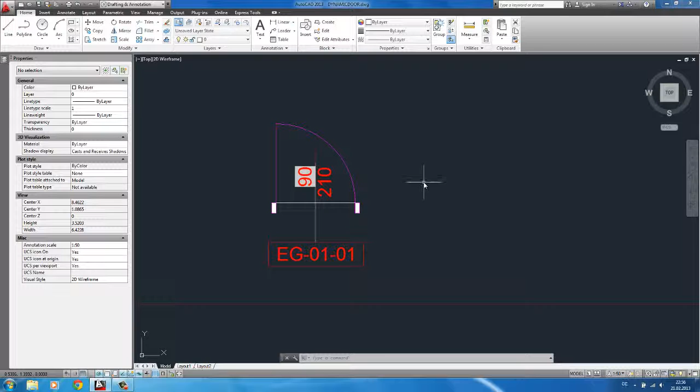So in this video I'd like to show you how to create this dynamic door block and a really simple door tag in AutoCAD. Well, I know that there are some tutorials out there that cover quite the same topic. Anyway, I thought it might be interesting to share this technique that I'm using here. Let's take a quick look at the final result that we're about to create.

You can see it is a block that has some grips attached. With these grips, you can easily change the width of the door frame according to the width of your wall. You can change the opening width, make it smaller or bigger.

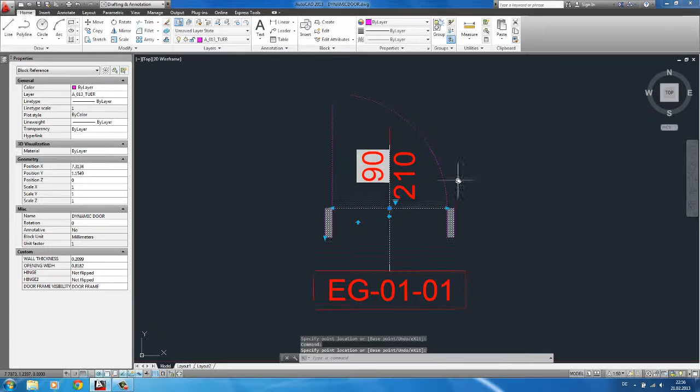Also, I added two flip actions to the block, so you can easily flip it around, something like this, just how you need it. And finally, I added a visibility state to the block that makes it possible to show or to hide the door frame. I will reset this block.

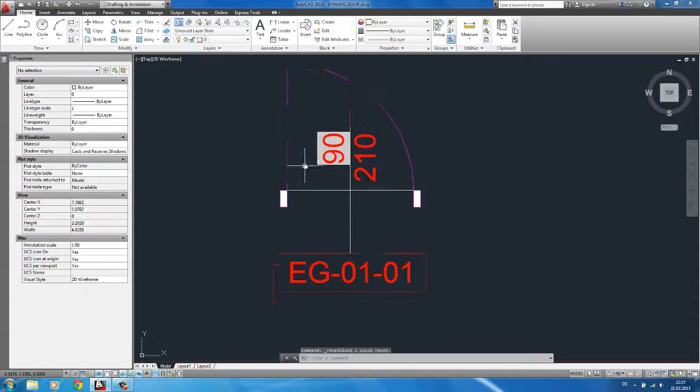This door is connected to this simple door tag, and this door tag is automatically displaying the current opening width. So for example, if I change the opening width to something like 1 meter, and type RE for regen in the command line, you can see that it's now displaying the correct opening width of the door.

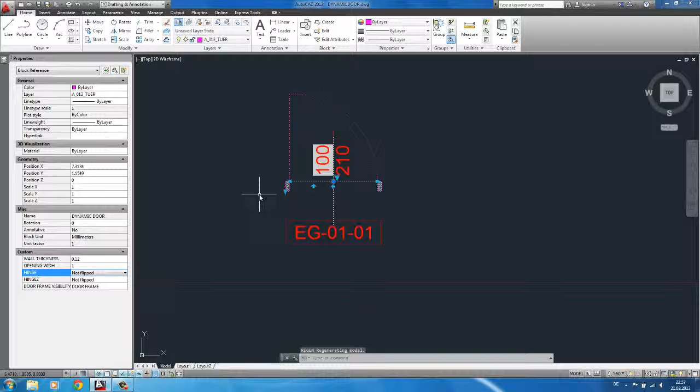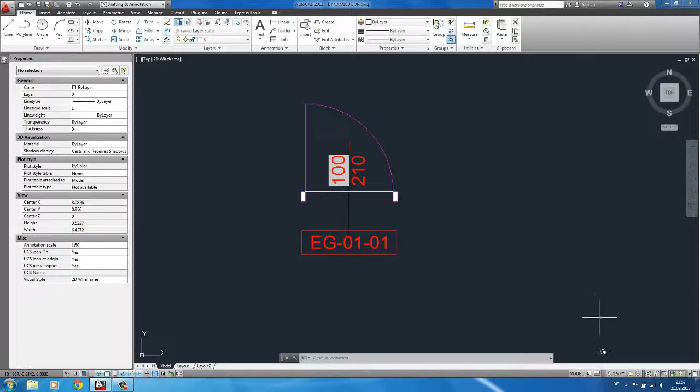I also added an annotation scale to this door tag, so it will automatically scale itself according to the scale of your drawing. Let's take a quick look at my AutoCAD. I use out of the box settings. I'm using metric units drawn in meters. I have my annotation scale set to 1 to 50.

The door itself is represented by some really simple AutoCAD lines. Here we have an arc. This door leaf is represented by a polyline. I also added these two auxiliary lines that are on a layer that finally won't plot. I just used them to position the door right. The door frame is represented by these two rectangles.

I also added a hatch. This is something that is not really necessary, but I tend to do it because I always have problems with the draw order in AutoCAD. And when the hatch is inside the block, I don't have to care about it anymore.

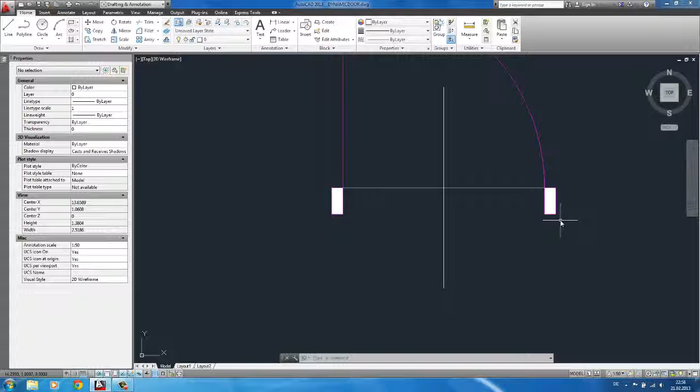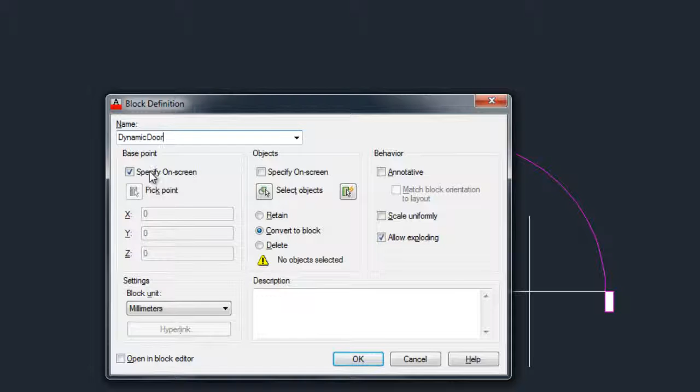To get started, first we have to create a block from the door. So I type block in the command line. I will call this door something like dynamic door. You can see that I have specify on screen base point checked, press OK, select all the objects,

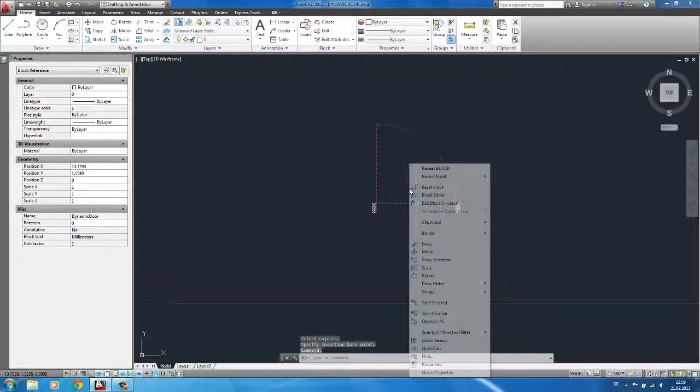enter, OK again, and for the insertion base point of the block I choose this point right in the middle of the door frame. Open it up in the block editor. First I will add a linear parameter that will represent the width of the door frame. I put it here, select it. I lower the number of grips to 1 because in this case I only need 1. I also will rename it to something like wall width.

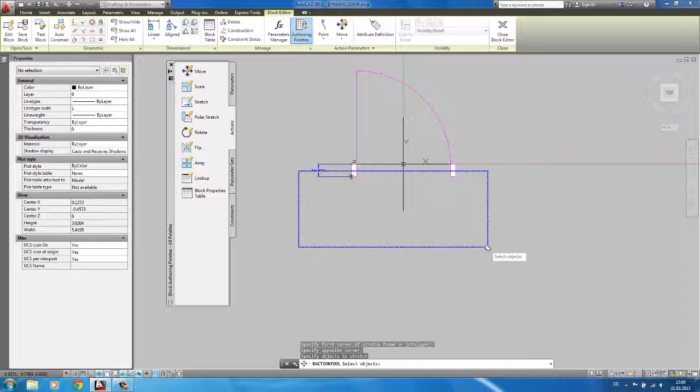Next I will add a stretch action to this parameter. Choose the stretch, select the parameter. As a base point, select this grip and draw a stretch frame. For the objects, I just choose these two rectangles that represent the door frame. Press enter. Let's test it, see if it works. Yes, this looks quite good to me.

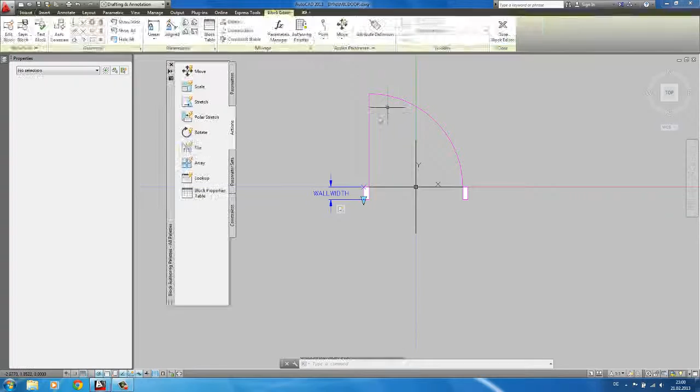Close the test block window and we will continue adding another linear parameter to the door. This parameter will represent the opening width of the door. So I put it here, select it. Here I will change its base location from start point to midpoint. And I will also rename it to something like opening width.

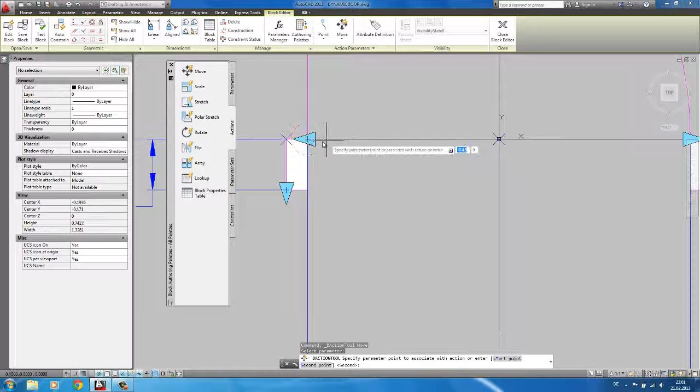Next I will add a move action to the parameter. Select the parameter, specify the base point, which is again the left grip. For the objects, just choose the left door frame. Press enter.

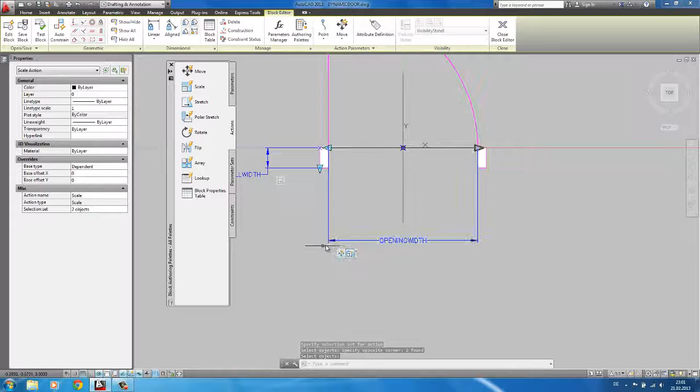Next I will add a scale action to the parameter. So choose scale, select the parameter, and for the select objects, just select these two lines that represent the leaf of the door. Press enter, switch to the scale action, change its base type from dependent to independent, and make sure that both its base X and base Y value is set to 0.

Next I will add another move action to the same parameter. This time I choose the right grip. For the objects I choose the right door frame. Press enter. Let's test it.

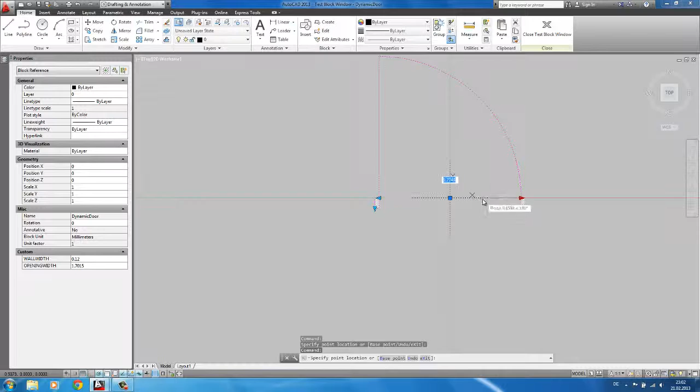This looks quite good to me. What you can see is that these two auxiliary lines are not scaling accordingly to the opening width of the door. This is something we have to fix in the next step.

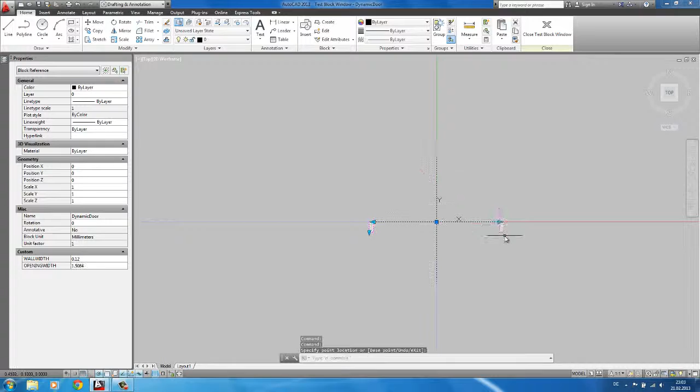So close the test block window, add another scale action to the parameter, and just select these two auxiliary lines. Switch to the scale action, change its base type also to independent, and make sure that again the base x and y is set to 0. Test it again. Now you can see these two lines are scaling accordingly to the opening width of the door.

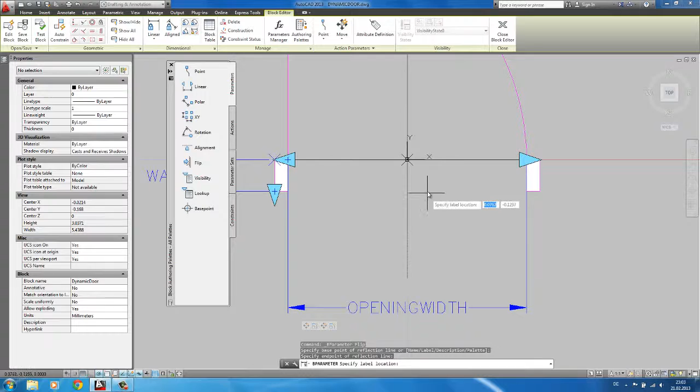Close it down again. Next I will add a flip parameter to the door. Choose the flip, and for now just put it here in the middle. I will rename this flip state to something like hinge 01. Like this, hinge 01.

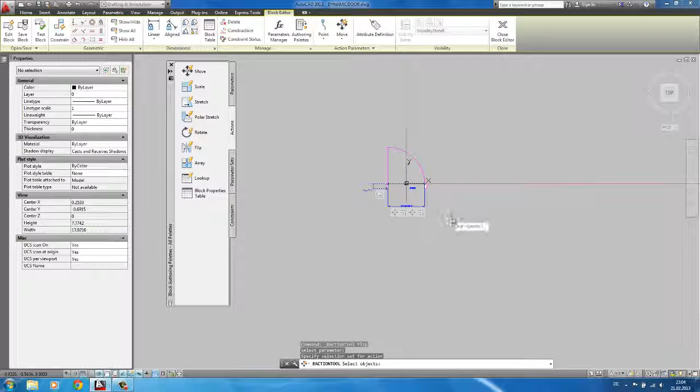And next I will add a flip action to the flip parameter. Select all the objects and enter. Let's test it how it works. Looks good to me. Close the test block window and add another flip parameter to the door.

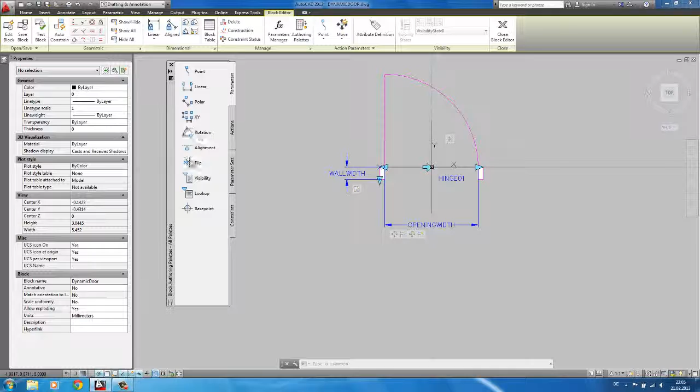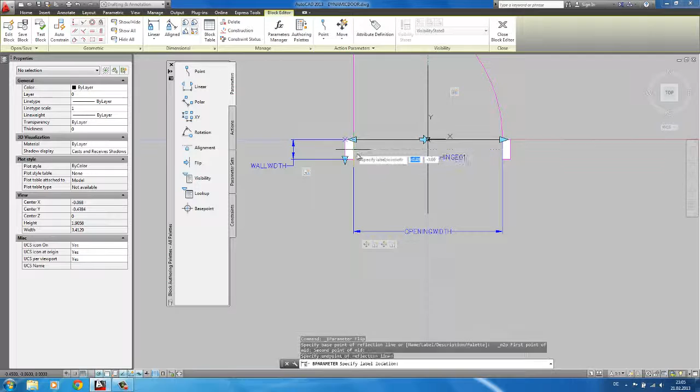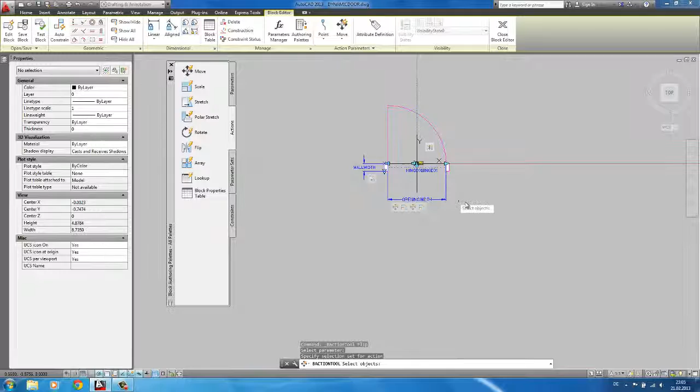This flip parameter I will put right in the middle of the door frame. I press Shift and the right mouse button to use the mid between 2 points snap. And put it somewhere in the middle. I rename the flip state to hinge 02, and I will add another flip action to this flip parameter. Choose that one and select all the objects. Let's test it.

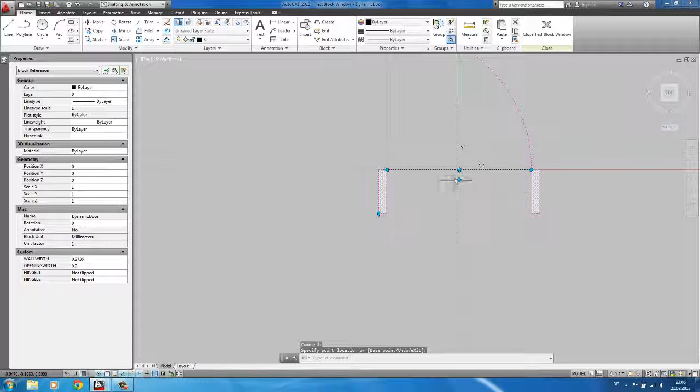You can see it's working quite well, but if you change the width of the door frame, this grip is not moving accordingly to the new size of the door frame. So in this case, it's not working anymore correctly, and you will have to adjust this door manually. We can fix that easily, and I will show you that in the next step.

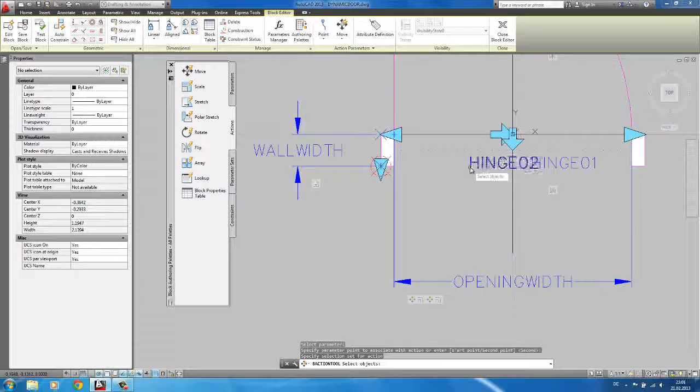Close the test block window down and add another move action to the wall width parameter. Select it. Choose again the grip as the starting point. And for the select objects, only choose the second flip parameter. Switch to the move action and change its distance multiplier to 0.5.

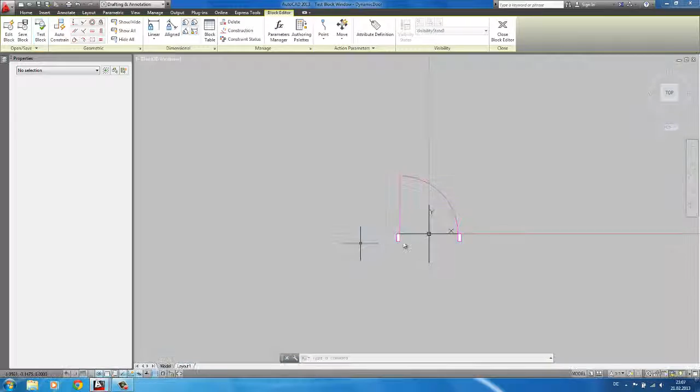In a sense, what we are doing here is telling AutoCAD that this grip of the flip should always be in the middle, or should have half the size of the wall width of the door. Let's see if this works. Now you can see this grip is moving accordingly to the door frame width of the door, and it's staying always in the middle of the door frame, which makes it easier to flip it. Close the test block window.

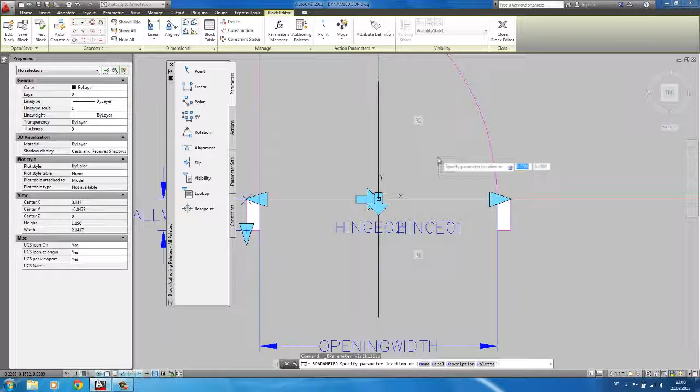Well, I think that we're mainly done with the base block. What I will add now is a visibility parameter. I will put it probably here. Bring it up a little bit. I will rename it to frame visibility. Select it, right click, and open up the visibility states menu.

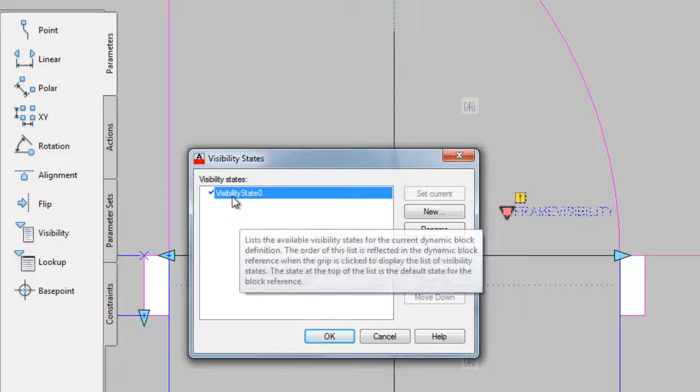The visibility state 0 I will rename to with door frame. I will add a new visibility state that leaves everything unchanged, but will have another name. So I will change the name to without door frame.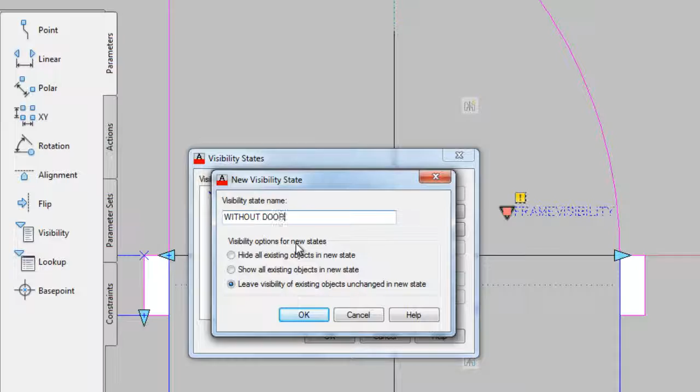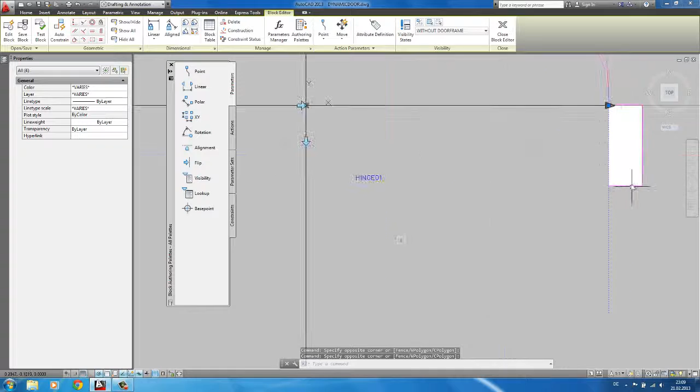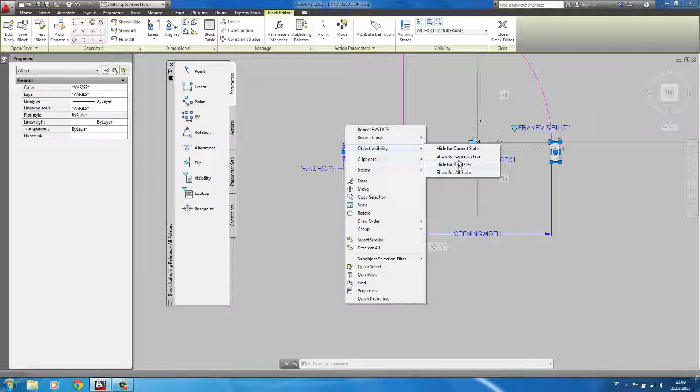Press OK. So the only thing we have to do now is to hide the objects we don't want to see. So in this case, carefully choose the objects that represent the door frame. And this parameter that is adjusting the size of the frame. Choose object visibility, hide for current state. Close the block editor, save the changes, and let's see if it works.

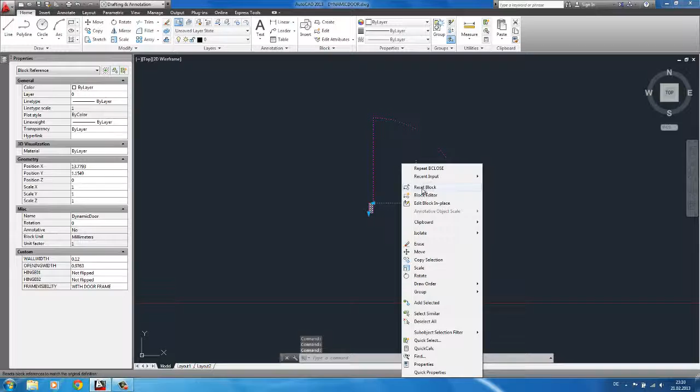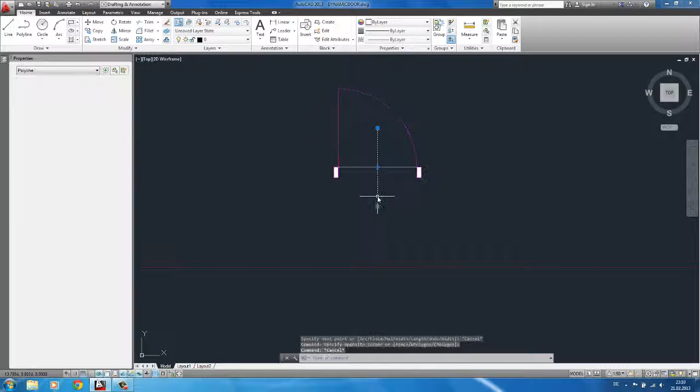Choose without door frame. And again, we have the same flexibility that we had before. I reset it. Next we will create this simple door frame. So first I will draw some lines in AutoCAD. Put them to the right layer. That is my door tag layer.

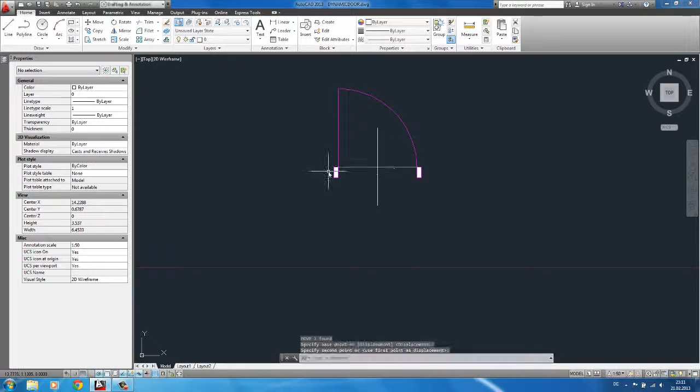Create a rectangle for the door number. Probably something like this. I put that door to the back and use the match property tool to switch the rectangle to the right layer. This looks quite good to me. Next I will define 3 simple attributes. So I enter ATTDEF in the command line.

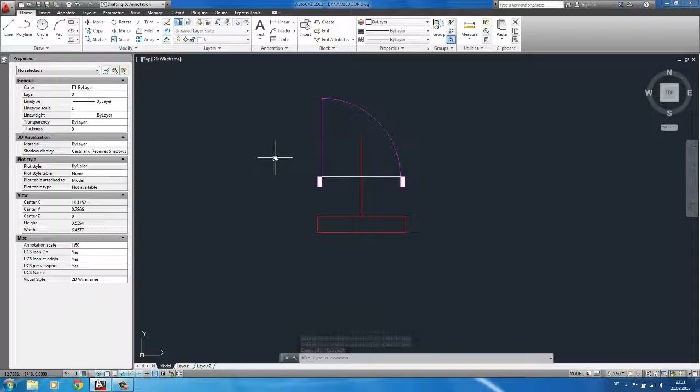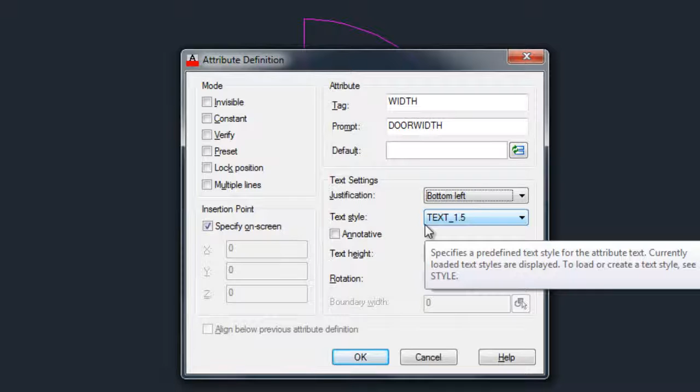I uncheck the lock position because probably I want to move them around. I will call this one width. For the prompt I enter door width. The default setting I leave empty for now. Justification I put to bottom left. The text style is set to text 1.5, which in my case is okay and will represent the correct size of the text. Press OK and put the attribute inside the drawing.

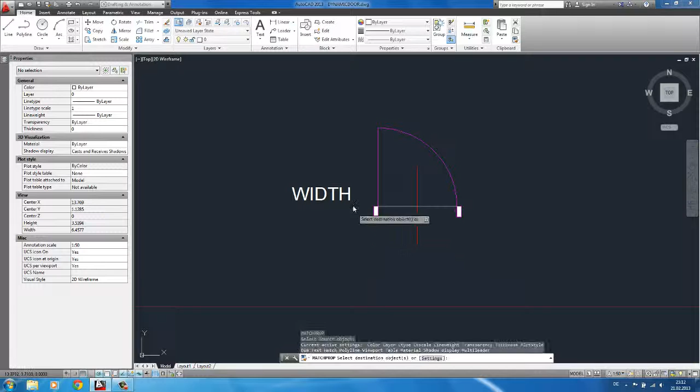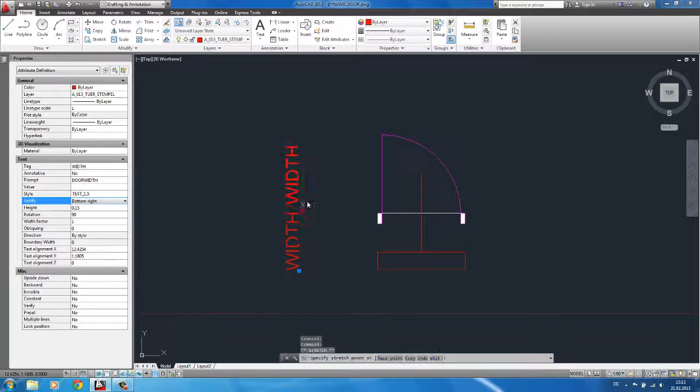Use again the match property tool to put it on the correct layer and rotate it 90 degrees. I will change the justification from bottom left to bottom right. And will position it something like here. We'll change this one later. Let's make a copy of it.

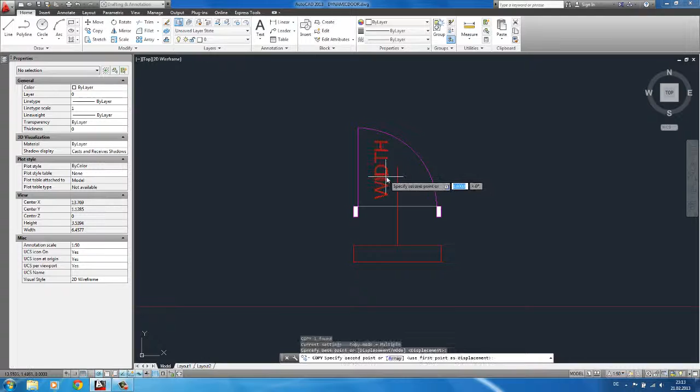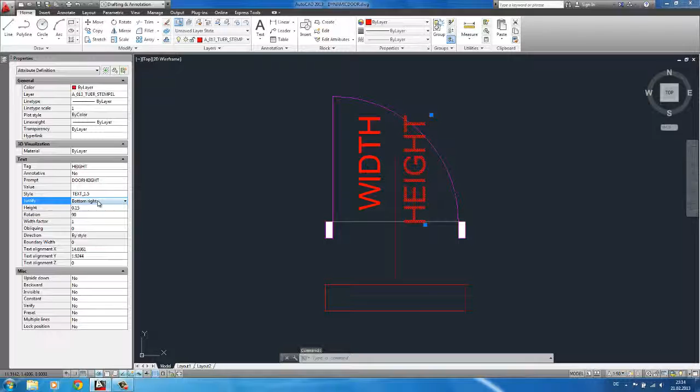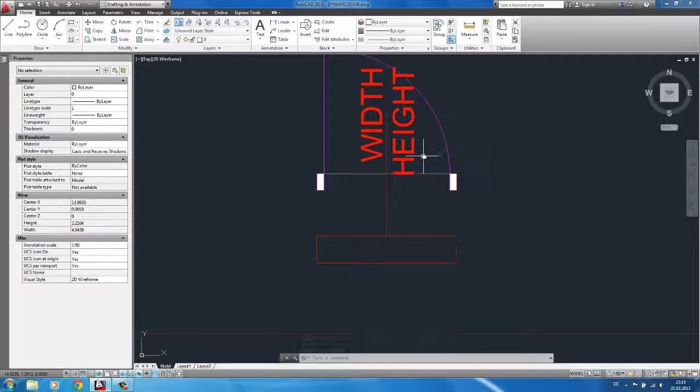Call that one height. Here I enter door height. I change the justification to bottom right. And position it probably here. So the only one that is missing now is the attribute that represents the door number. So I make another copy. And one copy is enough.

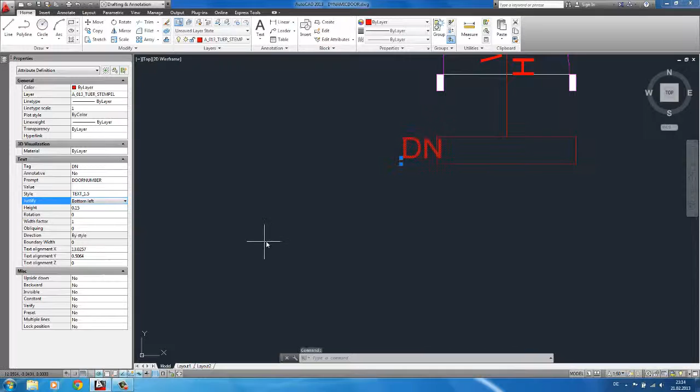Rotate it 90 degrees. Rename it to something like DN for door number. Door number. I put the justification to bottom left in this case. Let's position it probably here.

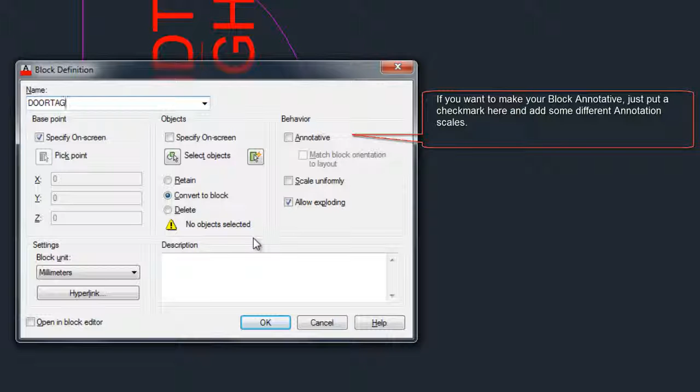And create a block. So I type again block in the command line. I call this one door tag 005. Press OK. Select all the objects. Deselect the door block. Enter. OK. And for the insertion base point, I select this intersection point here in the middle.

For the door number, I enter something like EG for the ground floor, 01 for my room number, and 01 for the number of the door. I mean, it depends how you do it. For the door height, I enter 210, so a little bit more than 2 meters.

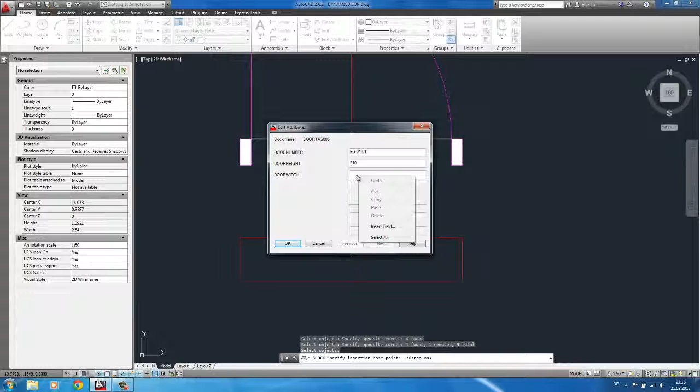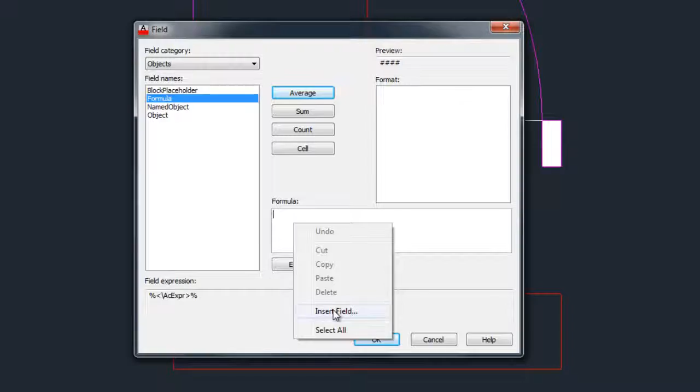And in the field with the door width, I press the right mouse button and insert a field. I choose the object category and switch to formula. In the formula window, I insert another field in the formula field. So right click, insert field. This time I choose again object, object, and select my door block. What I'm interested in is the opening width, so I choose this one and press OK.

As you can see, it's now displaying me the opening width of the door in meters. In this case, I would like to see it in centimeters, because for the height I also used a value in centimeters. To do this, I simply multiply it with 100, evaluate it, and change the precision to 0. Press OK and OK again. So this looks quite good to me. I think these two numbers should be a little bit more on the downside.

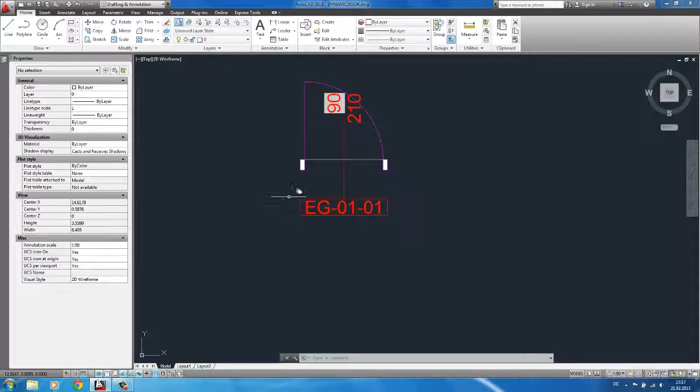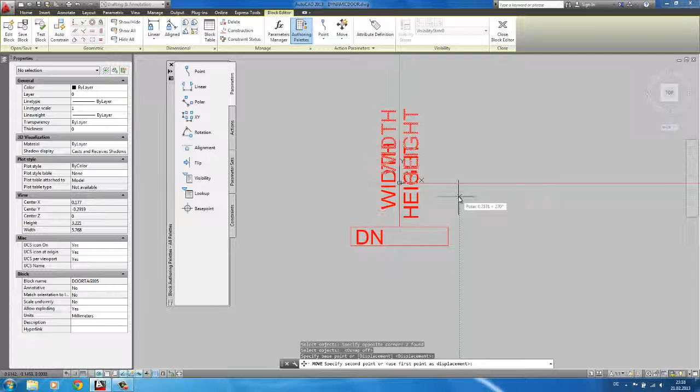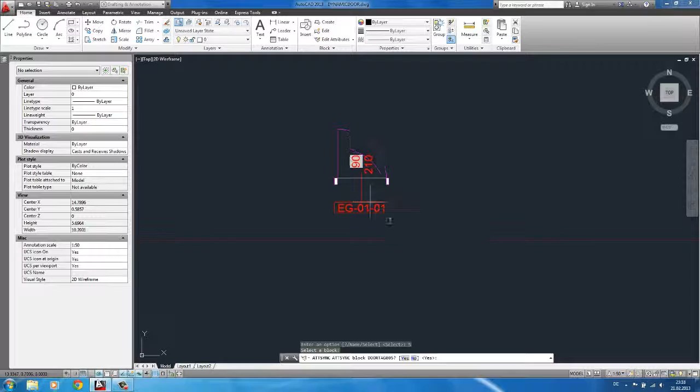So I open the tag in the block editor, switch to the move tool, and just put them a little bit more down. Close block editor, save the changes. As you can see, nothing changed. What we have to do is synchronize the attributes. So I enter attsync in the command line. I select the door tag, choose yes, and now this looks quite fine to me.

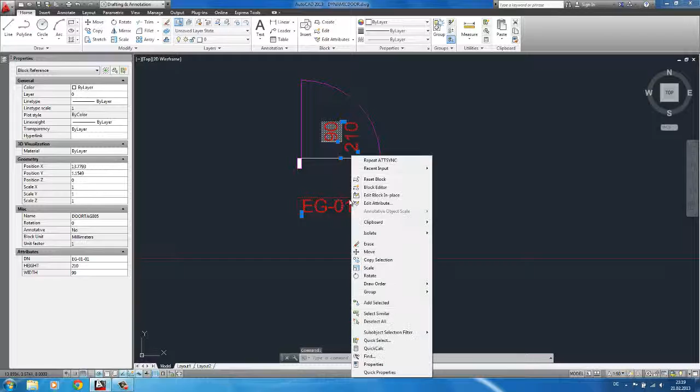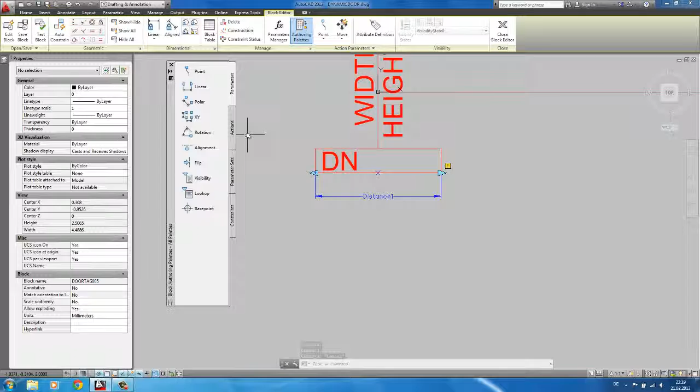I will add two other parameters to this door tag. So probably you want to change its size or the lines. So open it again in the block editor. I define a linear parameter here. I also change its base location from start point to midpoint. And I add two stretch actions to the parameter. So choose the stretch, select the parameter. For the first base point, choose the left grip, draw the stretch frame, and for the select objects, just select this rectangle.

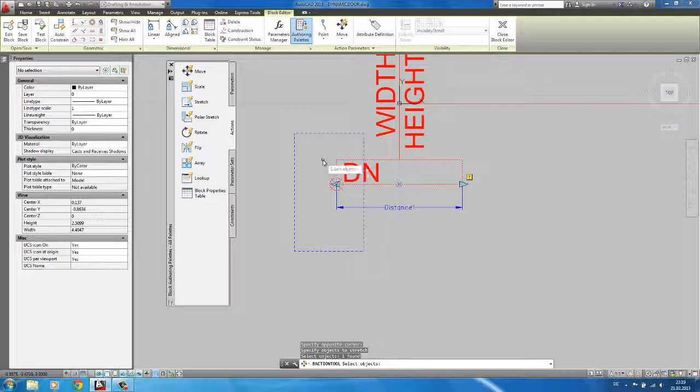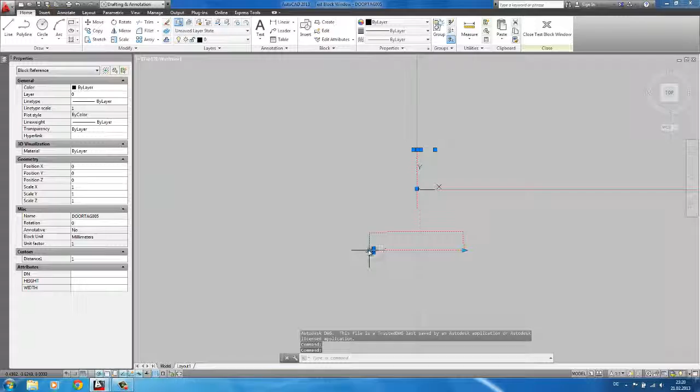Add another stretch action. Choose again the parameter. This time choose the left grip. Draw your stretch frame. Select objects, select again the rectangle, and enter. Let's see if it works. Yes, and you can see you can now scale it according to the amount of numbers that your door number contains.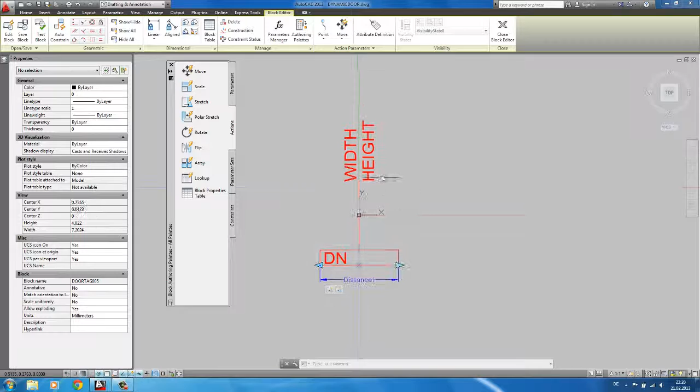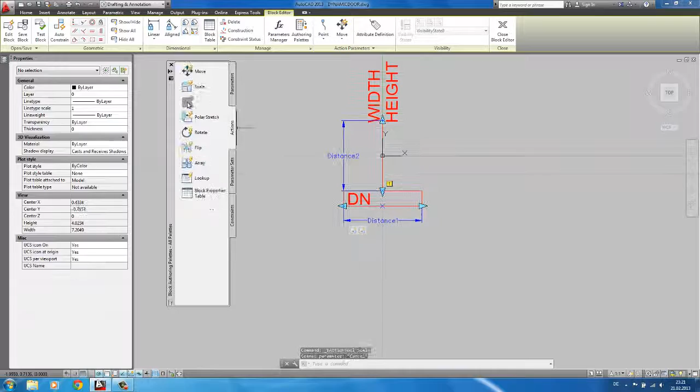Probably one other thing that you might want to do is to add another linear parameter to this door tag. Here we leave this parameter on its base location on start point, and we add again two stretch actions. Select the parameter. As the first start point, I select the upper grip. I draw my stretch frame, and for the objects I just select this polyline here.

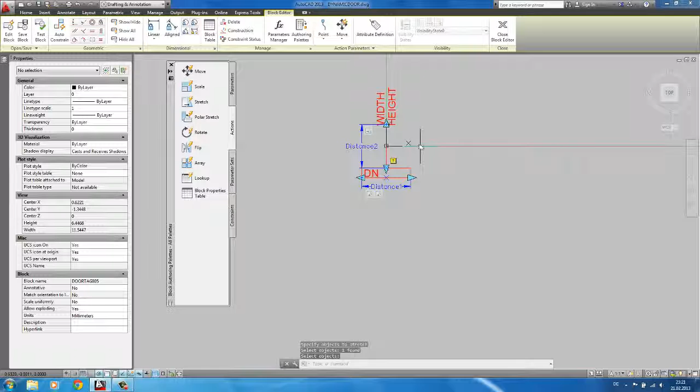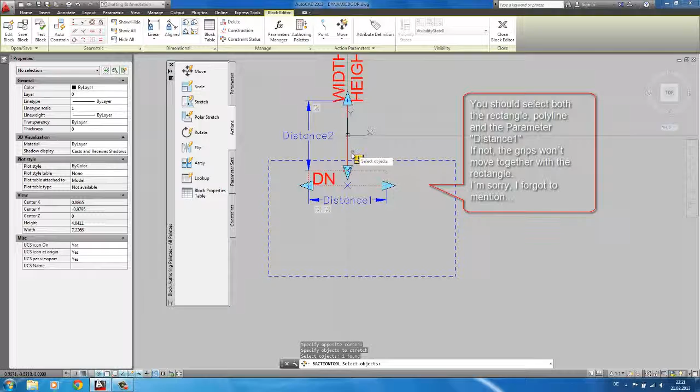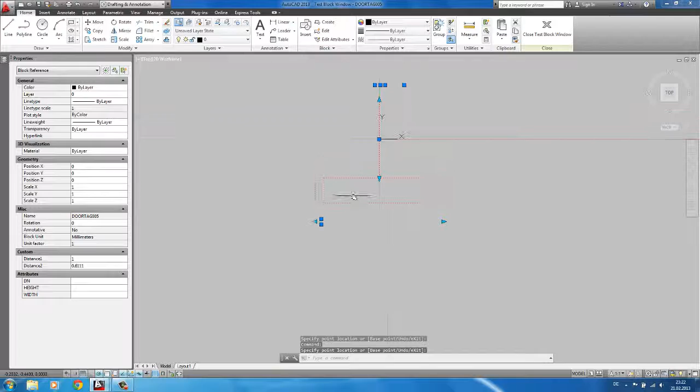I add another stretch action, choose the same parameter, specify its base point, draw your stretch frame, and for the objects just select the rectangle and the polyline. Let's test it. You can see you can now easily adjust the length of the lines. Close the block editor and save the changes to the door tag. So I think that we are almost done.

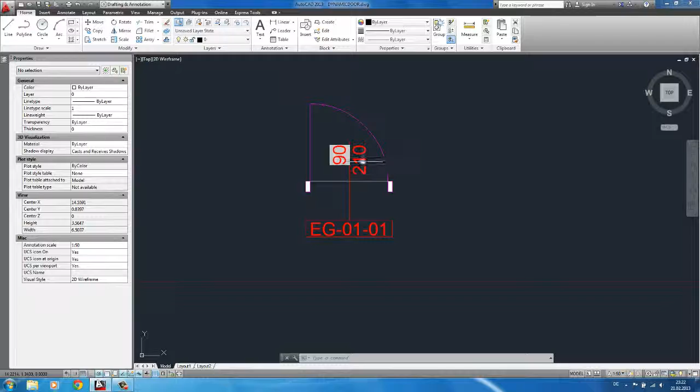Probably one last thing you might want to do is to add some predefined sizes for your door. So I open again the door block in the block editor. For the wall width, I change the distance type to list, and I will add some predefined wall widths that are most common for my work. So in my case this might be 0.125, 0.2, 0.3 or 0.35. I will delete this 0.12 and press OK.

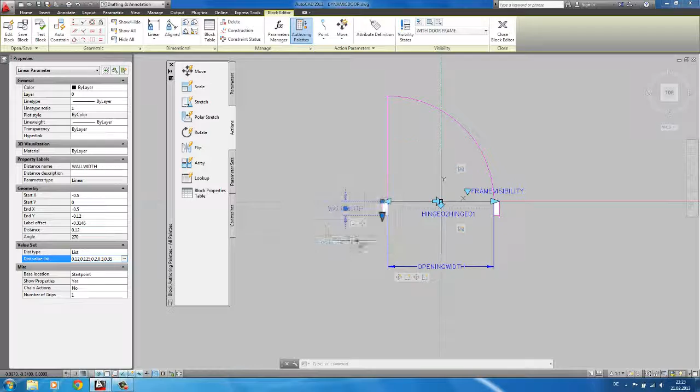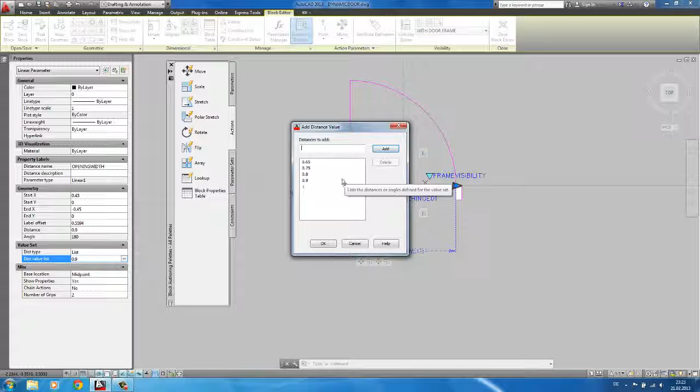The same you can do with the opening width of the door. Common opening widths of the door for me could be 0.65, 0.75, probably 0.8, 0.9 and 1 meter. You close the block editor, save the changes. Now you see it's automatically snapping to these predefined sizes of the door. You see now we have the 65, we have 75, 90, 1 meter. And here also 0.2, 0.3.

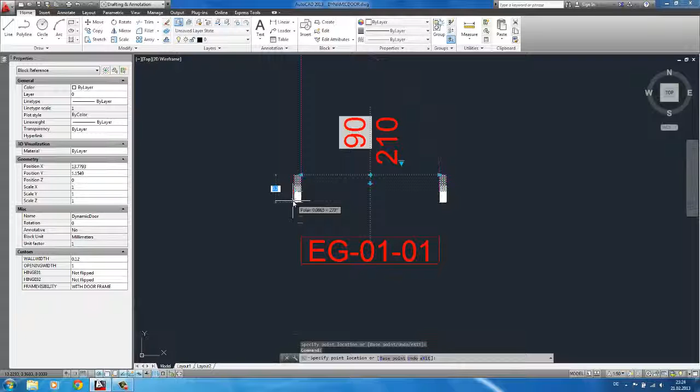I press regen, RE in the command line. You can see it's displaying the new opening width of the door. I think we're done for now.